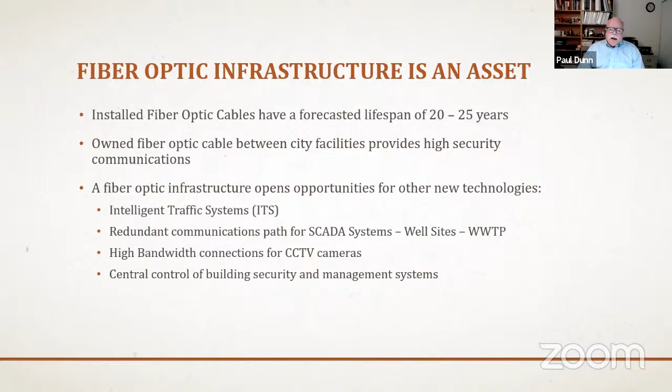CCTV cameras can be mounted at or on signal locations and can share the ITS connections to provide real-time visual information of the traffic situation within your city. You can also use a fiber network that centralizes all of your facilities to handle building management and security systems, and they'll benefit from central management and control.

We'll talk a little bit about fiber optic technology and how it compares to the technologies that we've grown familiar with, starting with dial-up. If you still have a dial-up connection today, you can get 56 kilobits of data per second, which amounts to not much.

If you imagine a 5 gigabyte movie at current data speeds that the city of Sumner operates at, which is approximately 150 megabits per second, it would take about 9 minutes to just download that data. At fiber optic, it would take about 5 seconds. So if you look at the capacity for a fiber optic network compared to Sumner's existing capacity, it's akin to trying to drink Lake Washington through a drinking straw.

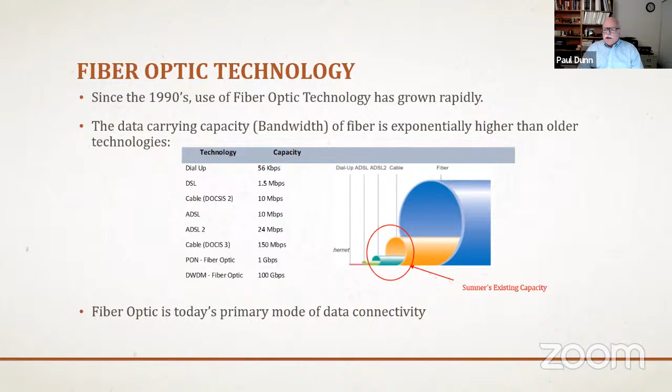I'll talk about fiber optic network construction methods, and there are 4 predominant ones. The first is standard plowing or trenching, and this involves a cut in the pavement or potentially alongside a road right of way, anywhere from 2 to 3 feet wide and down to about 4 to 5 feet deep. Inside that trench, you can install what are known as innerducts, or 4-inch conduits.

One conduit can hold usually about 3 innerducts. Think of those as miniature conduits that carry fiber optic cable. This is the highest cost and probably most intrusive construction method for implementing fiber optic. It can be as high as $300 a foot in high density or medium density urban areas.

When we did our construction estimates for the city of Sumner, we're estimating Sumner anywhere from $89 a foot to $113 a foot for construction. It's based on the location of the actual construction, whether it's in a right of way, in a street, or maybe on a trail. The national average is $173 a foot. So to sum up, it's the most disruptive and expensive construction method, especially if you're working in streets.

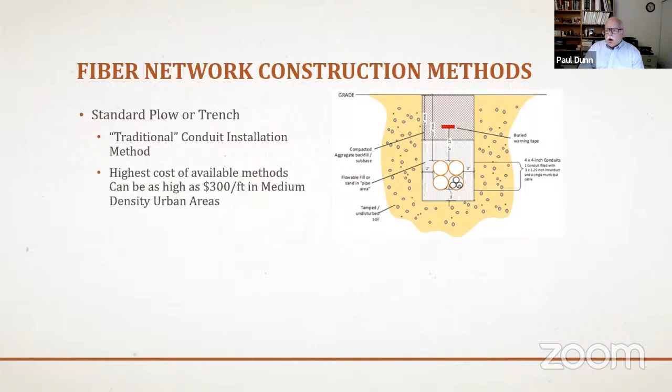A new technology that really started about 15 years ago is a concept called microtrench. Instead of digging that wide trench in a street, you're looking at a slit 1 to 3 inches wide and 18 to 24 inches deep. In the bottom of that small slit is installed micro conduit, and through that micro conduit, the fiber optic is usually blown through using pressurized air. It's really becoming a dominant construction technique in fiber optic network construction these days.

New York and Los Angeles have both adopted ordinances to support microtrenching. There are some areas in the city of New York that will not allow any other trenching method for fiber optic network installation. In Sumner, we estimated that microtrenching can range from $24 a foot in trail to $72 a foot in your right-of-way. There's a couple pictures here showing the actual grinding of a slit and then installation of micro conduit in that slit.

Some folks have been able to see up to half a mile per day of micro trench installation. So not only is it less impactful, but it is much faster than standard plow and trench.

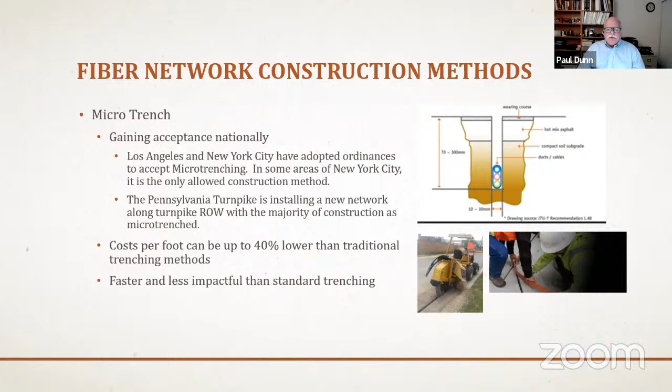Then there's aerial, and I think this is probably the one that we might find ourselves most familiar with because it's not underground. You see it on the poles around town. It's funny, as I was doing this study, I began spending a lot of time looking up at what was hanging off the telephone poles. I never did until I got down in the details of the study.

Aerial is the lowest cost construction method. It runs approximately $10 a foot. However, it's the most vulnerable construction method. It's vulnerable to vehicle accidents, tree trimming, weather, other natural disasters, and you also wind up with annual pole use fees. So if you're putting fiber optic cable onto a pole owned by Puget Sound Energy, right now the rates are about $17 a pole per year. So you have an annual cost that accrues as you're doing aerial construction. Again, balance it with lower cost, and it's a viable alternative.

The last predominant construction method is what's called horizontal directional boring. This is a photo of a boring machine. Most recently, the City of Auburn did a project down Lake Tapps Parkway from Lakeland Hills all the way down to East Valley Highway, and they used horizontal boring for the distance of that project.

In aerial construction, the construction cost estimate of $10 a foot includes labor, hardware, and what are called snowshoes in some cases. There's additional hardware used in an aerial installation. It's significantly lower because you're not digging underground. It would be mounting hardware, and in some cases what's called messenger wire, which actually holds the fiber optic in the air. So it is a lower cost.

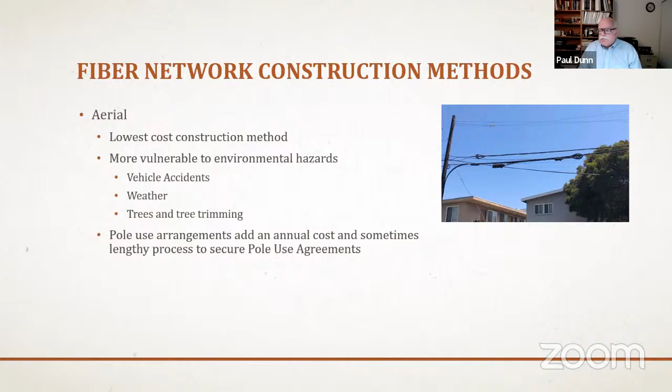All right, thank you. Any other questions for Mr. Dunn? I already have 17 wires on my telephone pole blocking my mountain view, so maybe one more wouldn't be seen, but I don't know. That is one consideration—there are some areas where those poles are getting pretty full. Yeah, I think that's all the questions we had.

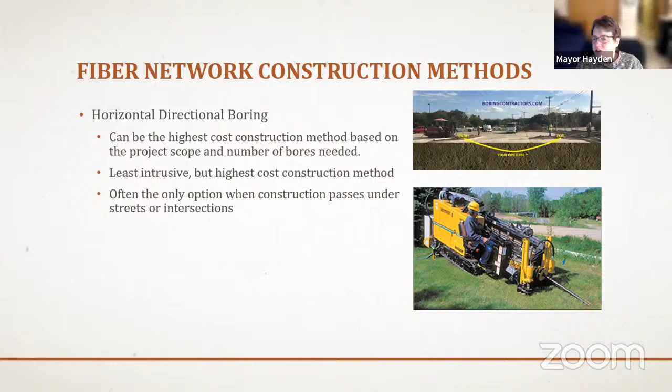Right, thank you. So Sumner's IT network today uses a buffet of different connection techniques. We have Comcast using Comcast Business that serves several of the locations. We have services from Lumen, also formerly known as CenturyLink, and we actually have some cellular hotspots coming via T-Mobile.

So each of these has distinct bandwidths. The highest bandwidth is at City Hall, and this represents your internet connection from the City of Sumner network out to the internet. Location to location coverage is at 100 megabits per second at the city shop, and then we go down to 40 megabits per second at the cemetery and the cemetery shops.

So right now it's a mix of commercial carriers to provide your data networking for IT between all city facilities. The limitations of bandwidth really come into play when you have a lower bandwidth connection. For example, voice communications to the cemetery is difficult, if not impossible. Bandwidth out to your senior center is fairly slow, which would limit public use. And you have a need for CCTV connections, like the Daffodil Valley Sports Complex, that just can't be met today.

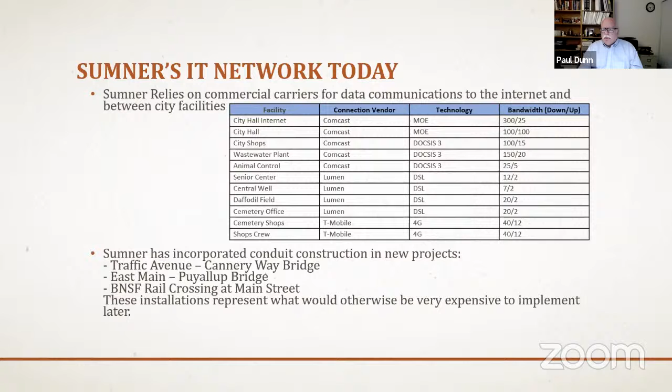Sumner IT department goals today are to establish resilient, sustainable connections out to the internet, to provision high-speed connectivity between the city facilities, building a full high-speed network between all city locations. You want to reduce your data connectivity costs, which gets into the own it versus lease it discussion, and also to partner with adjacent agencies and cities to establish connectivity. A good example would be connectivity between the City of Sumner and South Sound 911, allowing public safety communications a direct, secure fiber link between the city and South Sound 911 dispatch capabilities.

A Sumner-owned fiber network would reduce or eliminate your annual spend. Right now, you spend about $24,000 a year on data communications costs. Having your own network would drop those costs to zero.

As part of the study, we had discussions and conversations with Bonney Lake, Puyallup, the City of Auburn, the Sumner-Bonney Lake School District, and the Puyallup School District, as well as the Community Connectivity Consortium. In this presentation, I'll go into some details on each of your neighbors and neighbor agencies.

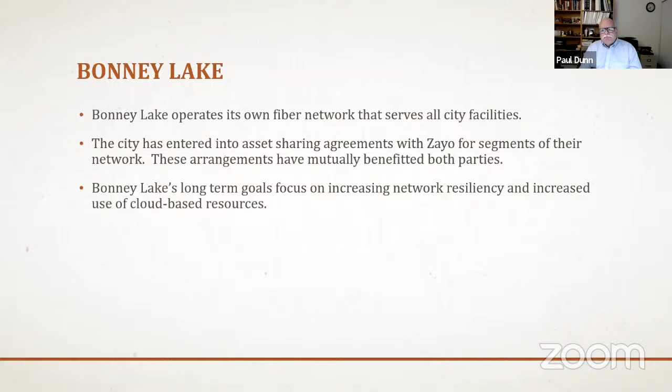The City of Puyallup's IT department manages not just IT and not just the IT network, but they also manage the city's fiber optic and traffic signal communications infrastructure. They have 62 signalized intersections. Right now, about half of those are connected via fiber, and the remaining signals connect wirelessly. So what they've been able to achieve is full control of all of their signalized intersections.

Right now, their overall communications budget is about $67,000. That comprises not just some leasing of fiber optics, but also their phone bill, cellular phones, and some data communication costs to the internet. Puyallup is contracted with Zayo and UPN, which stands for Unite Private Networks, for dark fiber connectivity, where city-owned infrastructure or fiber isn't present.

Dark fiber is basically fiber optics that are not controlled by the vendor. It's owned or leased directly by the City of Puyallup, and there's no third-party interaction to provide service over that fiber. They have partnered with Zayo and UPN, as well as the Puyallup School District, to share resources amongst themselves, and it has reduced their overall data communications budget.

Paul, what kind of maintenance does it take? You said fiber optic maintenance. Is it ongoing maintenance?

There's not a lot of ongoing maintenance. Generally, maintenance gets into areas where you might have a fiber cut or an interruption, say if there's a backhoe working on another project that interrupts fiber optic service. In some cases, you may need to do some splicing of fiber optic strands to serve other locations. So it's actually fairly low maintenance, but you do want to have some money in reserve for emergency maintenance, because fiber optic cuts never happen at 8 o'clock on a Tuesday morning.

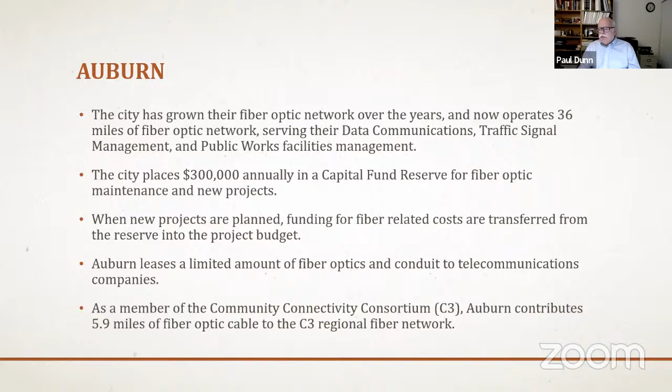The Sumner Bonney Lake School District, within Sumner, has 4 schools and 2 program locations. They also have administrative offices housed in Sumner. In 2016, they completed a build out of a leased fiber optic network with WAVE, also known as Astound Broadband. All of their schools are connected via a high-speed fiber optic network. The initial cost of that network was $1.32 million.

In 2021, their communication budget was $157,315 for data services, representing leasing services from WAVE to serve their network. The good news for school districts and libraries is the federal government's E-rate program — they recapture about 50% of their communication spend. They really saw the need as the 2010s advanced to get high-speed data services to all of their schools.

As we all know, technology in schools has blossomed since the early 2000s, and the requirement for high-speed connectivity just keeps increasing. With every student having a laptop, think of the bandwidth that's needed in those environments. So they've done a pretty good job building out their network.

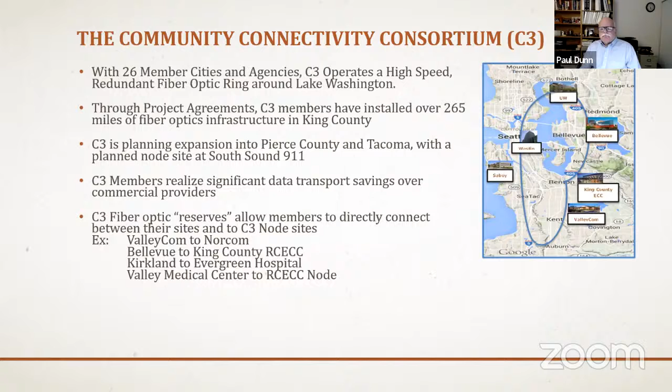Sumner currently has franchise agreements with 6 telecommunications companies. Most of those agreements are to allow the companies to operate and manage long-haul data lines through the city. Zayo and Wave currently have infrastructure in Sumner to serve data communications customers. We mentioned Sumner Bonney Lake School District as a Wave customer. Zayo is a Bonney Lake provider and also has some private services within the city. Comcast has exclusive or non-exclusive cable TV provider status for internet services and cable TV to all points in Sumner.

And I'll stop here for questions. We're at 6:35. I understand that we'll need to wrap up by 7, so I'll go as quickly as I can.

Mayor, I think you're muted. Do we have any questions for Mr. Dunn?

Councilmember Stewart: Thank you. I just had a question about that last bullet point. Does this allow, or would it ever in the future allow us, the ability of the city to allow citizens to get cheaper cable and internet service?

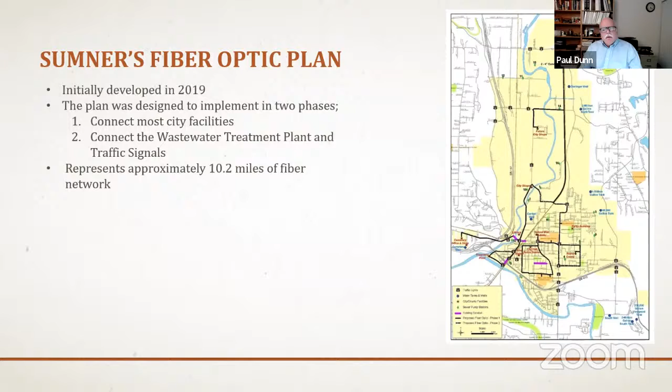So in 2019, Sumner IT Department and Public Works Department put together what they felt was a high-level plan implementing a possible fiber optic network. They put this into 2 phases. The first was to connect most city facilities, and the second part of the phase was to connect traffic signals and the wastewater treatment plant.

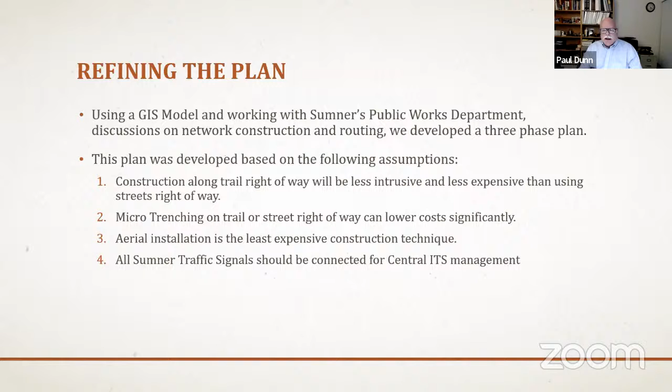Now, when we began working with Sumner and examining plans, we did some refinements. We based it on the following assumptions: that trail right-of-way is less intrusive and less expensive than using streets. We know that micro-trenching, either on trail or street right-of-way, will lower costs significantly. Aerial is the least expensive, and it really seems to be a priority within Sumner to get all of your traffic signals connected for central management.

So Councilmember Cole, to answer your question, the network as we designed it is about 9.1 miles total, and it's broken into 3 phases. The first phase is 3.3 miles, the second phase is 3.3 miles, and the third phase is 2.5 miles. 2 miles are on trail right-of-way, and 5 miles of aerial path are available.

In the first phase, we install what we called the north-south backbone. We installed the core of that backbone, and we connect priority city facilities. Phase 2 builds out the north-south backbone and connects more city facilities. Phase 3 is designed to be a la carte. You can actually take individual projects as required that basically connect to the already established network.

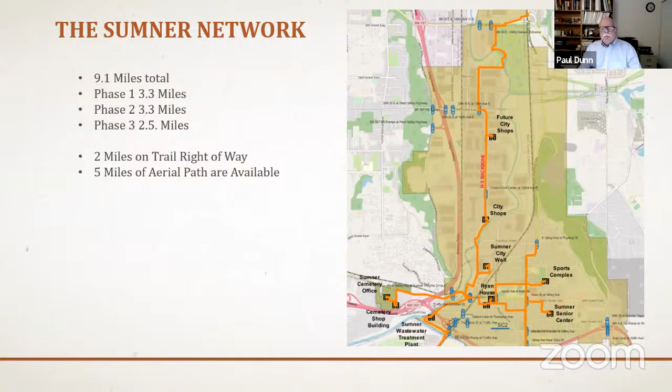So I do want to leave a lot of time at the end for questions. I will say in the report, these projects are detailed out, heavy detail with construction cost estimates and so forth.

So we'll say that phase 1 is primarily aerial. If you look at the long stretches of blue on existing poles, the orange is underground trenching or micro trenching. And we estimated phase 1 to connect the future city shops, the city hall, the wastewater treatment plant, and some of the signals along 142nd, as well as on Main Street. The initial cost for phase 1 is about $505,000.

In phase 2, we connect remaining city facilities. So this adds the cemetery, the shops and office at the cemetery, the Ryan House, the senior center, the sports complex. It also completes the east-west fiber link to move across from City Hall to the sports complex and a portion of the Valley Avenue north-south backbone. And it connects traffic signals along those routes as well. Most significantly, the Cannery Way Bridge and onto Valley Avenue heading west. Phase 2 uses primarily microtrench, aerial construction where it's feasible, and the construction cost estimate is about $860,000.

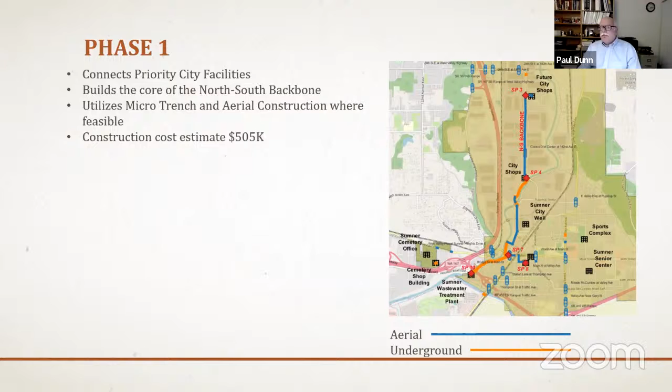Councilmember, did you have something? Yeah, now in phase 1, when I'm looking at the map, there are a bunch of blue symbols. Are those relay stations or what are those? Those are existing traffic signals. Oh, okay, that makes sense. All right, thank you.

Okay, that's a very high level review of the 3 phases of the project. I'll stop here for questions and happy to clarify anything. Any other questions for Mr. Dunn? I see none. Okay, thank you, Mayor.

Oh wait, actually Mr. Reed. I have a couple. First of all, I know it's definitely important for the tech side of healthy businesses. And I recognize that this is primarily focused on providing internal city services to our shops and other locations, which makes total sense. But I have a couple of questions about, one is, what is our ask? Other than, is this just an update of the study?

And then a couple of other things that are missing that I would prefer to see included, or maybe could be followed up later, would be like a 20-year cost to build and maintain versus a 20-year cost to lease or contract with an established ISP. And you already answered my other question about 5G. And then, I don't know the partnerships and the competition, but I also wondered how PSE could be a part of this.

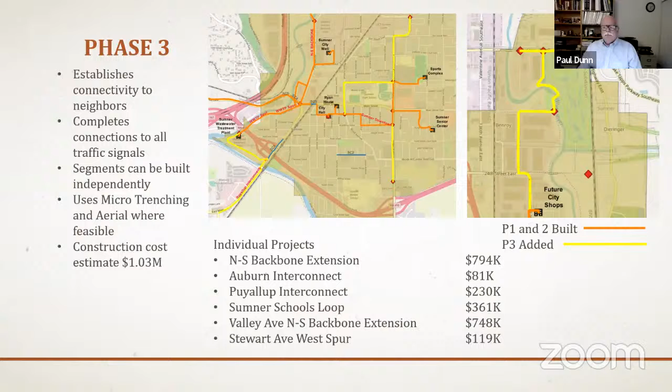Okay, thank you. We'll move into the fun part of the presentation, and this is recommendations. We have three categories of recommendations for you. One relates to standards and practices for development and construction, basically a how-to manual that allows the foundation for further planning. We'll talk about funding strategies, what we know is available, and we'll talk about collaboration and public-private partnerships. Hopefully we'll have a little time for a deeper dive into Q&A when we're all done.

Under standards and practices, we're advising that a fiber optic master plan for the city be developed. That differs from this presentation, in that what we did here was a pro forma construction cost and plan estimate. A fiber optic master plan will allow Sumner to align overall long-term strategic objectives with fiber optic network strategies. You can address how the network will benefit the city and identify a path toward completion. Ideally, that plan addresses the first five years in great detail, with less detailed but strategic goals for the next 10 to 20 years.

Micro-trenching construction is going to save significant costs. The city should consider adopting standards for micro-trenching and its placement — that is to say, where it is appropriate and where it is not.

In the area of funding strategies, there's a few areas, and first would be the city budget. As we mentioned earlier, Auburn has established a long-term reserve for fiber optic projects. They've been able to put a lot of their fiber optic network on layaway, if you will. They have some money set aside for it.

In discussions with IT and Public Works and also with City Administrator Wilson, the consideration of rate models, including the network costs for the wastewater treatment plant portion of the network, might allow some revenue if rates were adjusted to help finance the projects.

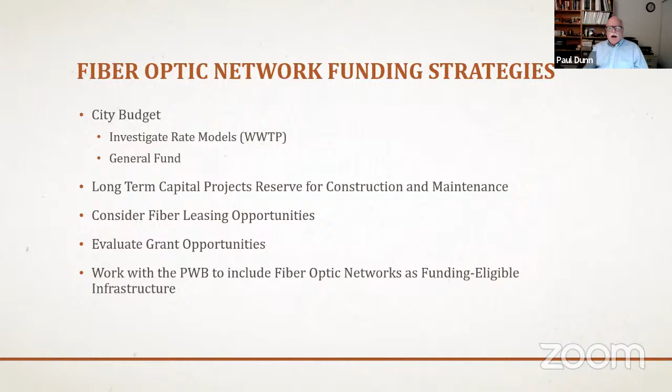I would recommend expanding partnerships between Sumner and your local cities and agencies. Each of the neighbor cities and school districts are willing to collaborate on projects. Public Works and IT should get together on a regular and frequent basis to share ideas and information. C3 offers a regional opportunity to engage and collaborate. Membership is free. C3's vision to expand into Pierce County means Sumner's membership would likely be welcomed. A public partnership could benefit current franchisees, Wave and Zayo, in expanding their networks and services within the cities.

And the case study that we mentioned between Westminster, Maryland, and Ting Networks reveals a real economic opportunity for them. In addition to building the city's municipal IT network, the city realizes revenues of $689,000 a year in leasing and subscription revenues. And Ting Networks is the internet service provider, so it's not a city utility.

And just a quick mention, also in the report is Morristown, Tennessee. They were an early adopter of fiber optics technology. In 2019, they generated $8.9 million of revenue.

So our conclusions, very quickly - I apologize, I'm running right up against one hour. Long-term fiber leases can supplement funding for projects. Existing franchises may want to expand within Sumner. We'd recommend that you look at UASI grant opportunities.

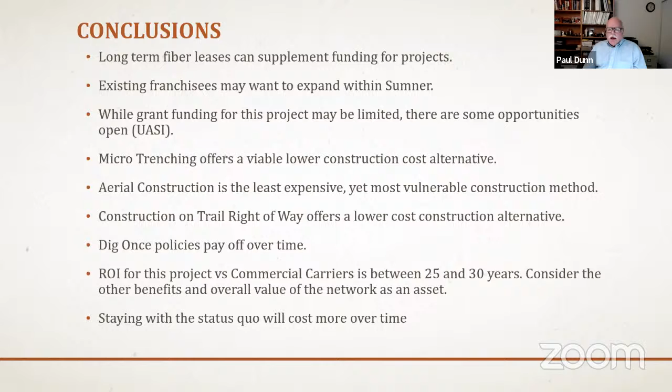And really at this point, I say this is the question of do you own versus lease? One thing we do know is that Comcast is not going to hold their rates at their current level for the next 25 to 30 years. Their costs will go up. So really, to conclude, I think staying with the status quo will continue to cost more over time.

Next steps, we'd recommend adopting standards and practices, build out a fiber optic master plan, consider dig-once policies, look at funding strategies for your 2023 and 2024 budget, and explore collaboration with public and private partnerships.

That opens it up for questions and discussion. Do we have any more questions for Mr. Dunn?

Councilmember Reed: Thank you, I've got a question, Mr. Dunn, on public-private partnerships. Are you aware of any type of voluntary improvement districts where the cost is shared through some major users that would benefit from it?

I will say that the South Bay Council of Cities in the Long Beach area in California has worked with commercial entities in building out their fiber optic network. So those opportunities are there.

And I think in summary, you do have good opportunities with Costco, REI, and Amazon in particular. That's what I was thinking, with their heavy technology needs and reliance, that there might be quite a few public-private partnerships available.

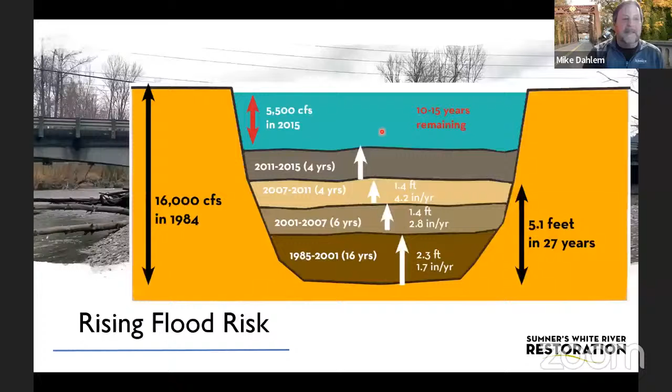So what we've done is come up with basically 4 projects. These projects are to widen out the area that the river can flow, but also keep it within that confined area so it doesn't flood the different areas, especially the industrial area.

The fourth project is what we call a habitat project, and that's the project we're going to talk about most today.

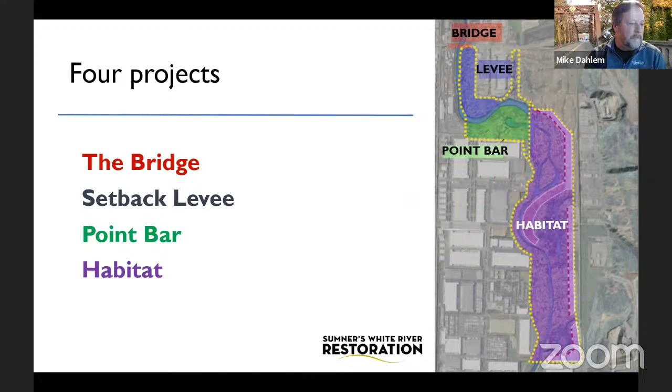The habitat project restores about 170 acres back to the floodplains. We'll be creating side channels, wetlands, and large storage areas for the floodwater, so it goes into this habitat project rather than going into the industrial area, and provides additional habitat for our endangered species, salmon.

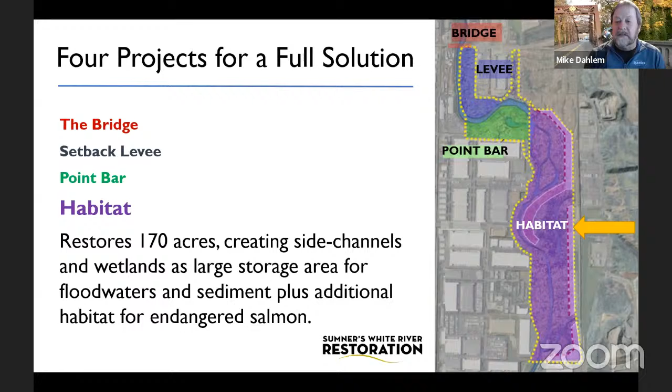And with that, I'll turn it over to Robbie.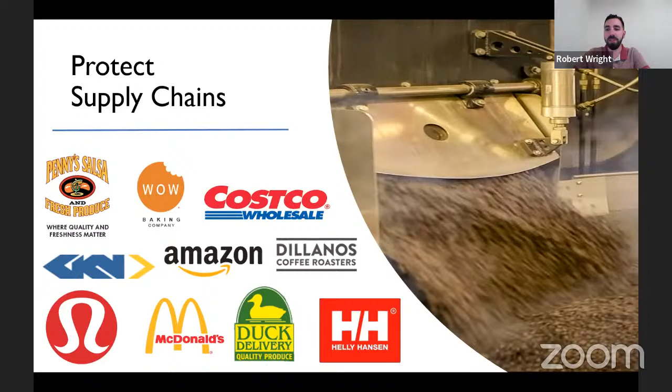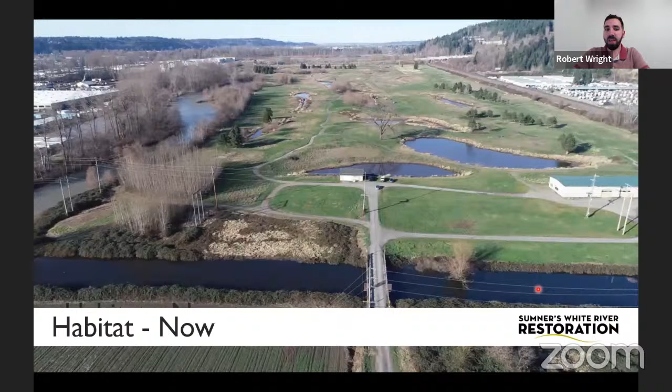This will give you an image of what it's going to look like. Here's before—this is at the tail race looking north towards the golf course, with 16th Street at the north end. This is kind of how it looks today, the before picture. And this is how we expect it to look in the future, post-project.

The gray area is where the BNSF tracks will be. As you can see, we're creating a whole new river channel, which is where that big habitat benefit's going to be coming from for the salmon—a place for them to get out of the main river when flows are getting as high as they are tonight, so they can seek refuge, hide, and eat some food to grow bigger before they migrate downstream out into the Puget Sound.

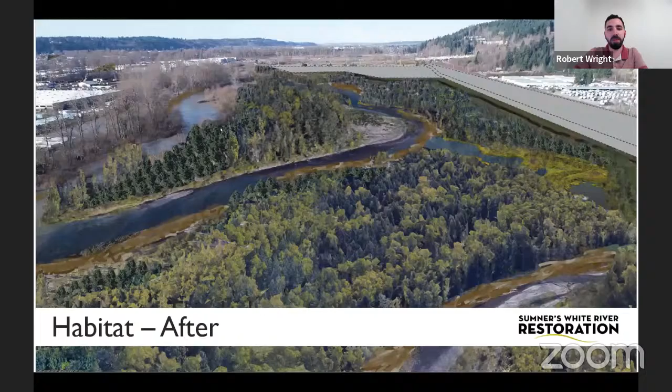We have another slide showing the before. For scale reference, Mike said 170 acres—how big is 170 acres? It's hard to fathom until you see it from an aerial. That entire side, from all the farmland up to the golf course we were looking at earlier, is part of this project. This is the largest project of this type in Pierce County, possibly even the state.

Here's another image of what we expect it to look like in the future. We're moving a lot of dirt, over 1 million cubic yards of it or so, but we'll get more into that later.

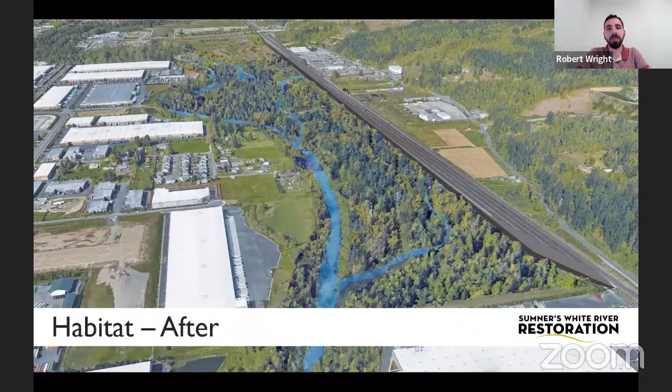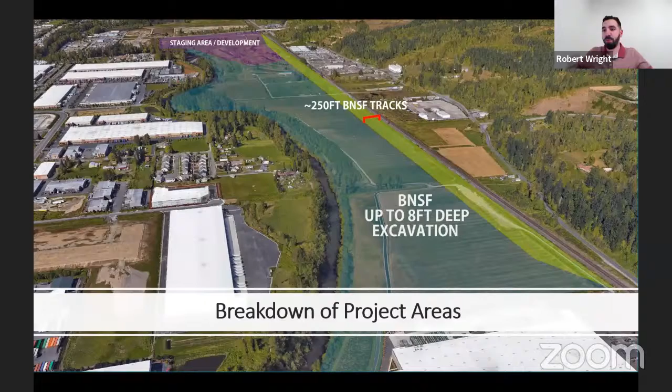Here's some stuff on how it will tie in later. We mentioned partnerships—one of our partners is BNSF, and here's where their work ties in with the development, but we'll get into that more in Andrea's portion. With that, we turn it over to Mike to talk about our partnerships some more.

Thanks, Robbie. Good evening, Mayor, Council. When the city first started this, we received legislative funds back in the last quarter of 2015. At that time, first quarter of 2016, we created what we called a dialogue group. Part of that group was Pierce County, the Puyallup Indian tribes, and the Muckleshoot tribes. After 45 meetings, this dialogue group has enlarged to include BNSF, Cascade Water Alliance, and the organizations you see in black, like Floodplains by Design and the Nature Conservancy. They've either been presented this presentation, been part of the dialogue group, or chose to come to a couple of the dialogue group meetings.

So with those funds, we were to create a solution for and design one project north of 16th Street. And we had to really look at the whole river from north of our jurisdiction all the way to the confluence.

The other thing that has happened within this dialogue group is that these entities, mainly Pierce County, Puyallup, and Muckleshoot tribes, have been involved in the design. So the permit application that we submitted last year to the Army Corps of Engineers has had input from this group, and has been a collaborative effort, so we've been very successful in making sure that the Army Corps of Engineers and Fish and Wildlife know that we've had this collaboration with the tribes.

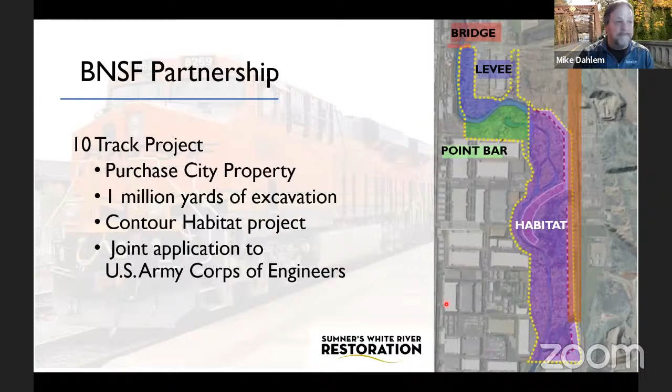We're also partnering with Cascade Water Alliance. It's part of the three-party agreement we'll talk about later, but we'll be swapping some land with the railroad and Cascade in order to build this whole project.

They authorized their property so that we could put in the permit prior to transferring the ownership of the property. And the other part is allowing us to relocate the tail race.

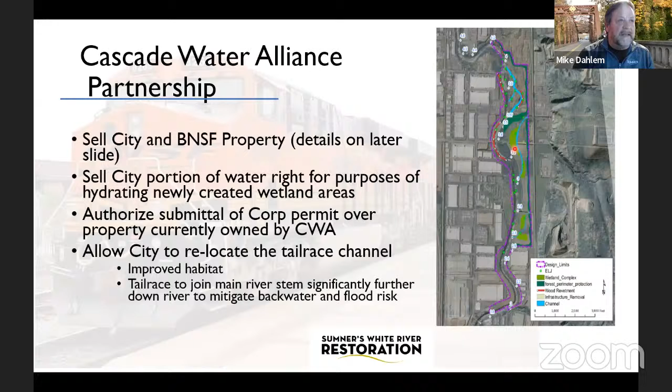Right now, the tail race just goes straight out to the river here. On the other side of the Burlington Northern tracks, we'll be turning it to the south and moving it down so it meets the river further downstream. That'll help keep backwatering, water from the river going backwards into their turnstocks at where they release the water from Lake Tapps. Also create nice habitat for salmon in there with the backwater.

So our current status, we did put in our Corps permit in June of 2021. We expect it to take about 12 to 18 months, so we're not looking for our permit till after June of this year. We've done a SEPA on the habitat project. We've completed 90% of plans for this. We've reviewed it, so everybody's put their comments in, and we're finalizing those plans as we speak.

And then we're completing the utility relocation design and also the permitting to relocate those utilities. We're hoping to do that this spring, summertime, relocate our utilities and try to get PSE in right behind us to relocate their utilities.

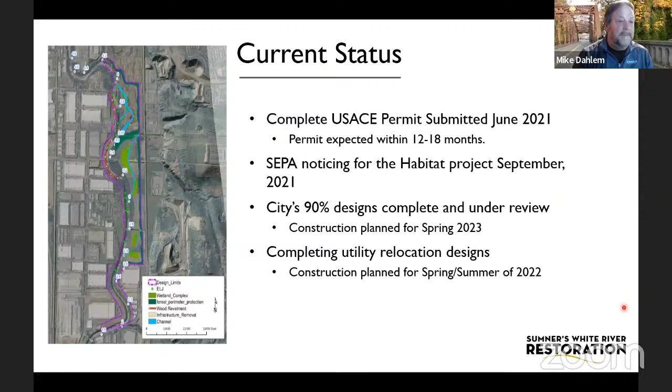So now I'll turn it over to Andrea.

Okay, thanks, Mike. So the project components that everybody just spoke about ultimately have to be wrapped up in written agreements so that all of the parties involved in this huge project understand their roles and responsibilities, the timing, etc. So my goal tonight is to introduce you to the master agreements at a high level, the basic purposes and terms of those agreements, so that you have an idea of what to expect in the coming months as we continue to negotiate with all of our partners on the agreements that will ultimately make this project a success. Our goal is to have these agreements negotiated and ready to execute for council approval by the time that a Corps permit is issued.

So the first agreement that I want to introduce you to tonight is a purchase and sale agreement between the City of Sumner and BNSF. This is about that strip of property that Robbie and Mike just spoke about for BNSF's sidetrack project. It's approximately 250 feet, and there's an image on the next slide that we'll get to. There's approximately 250 feet there in the lime green that BNSF needs in order to build out their 10 sidetracks.

As part of that purchase and sale agreement, there are terms and provisions that relate to BNSF's excavation of the 1 million cubic yards of soil, and also the logs that BNSF currently owns, that they will be providing to the city in kind for our engineered log jams that will go in these side river channels. So the value of the work BNSF will be providing to the city is providing the city with fair value for the property that it will convey to BNSF. This is not intended to have cash exchange hands, but rather be a swap of services for property.

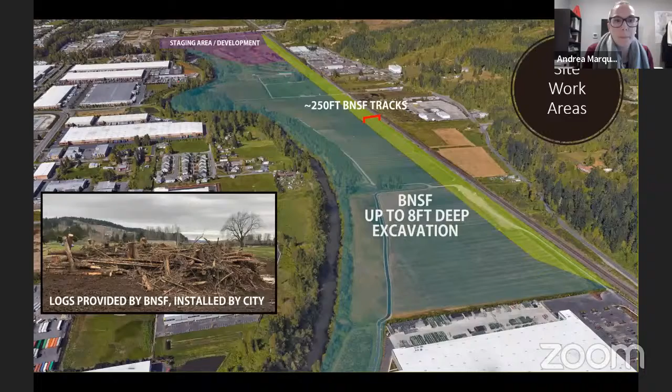Next slide. So the second agreement is called the site work agreement. This agreement is also between the City of Sumner and BNSF. And the site work agreement is really the meat of the deal between us and the railroad. It discusses who is responsible for what and when.

So for example, there are provisions about the collaborative effort we have already undertaken regarding the permit applications to the Army Corps of Engineers. That was a design and application preparation exercise that members of the city and BNSF team shared equally. And it's been years of work in the making before we were even prepared to submit for that Corps permit.

It discusses design and construction plan, preparation and approval processes. It discusses the side channel work that BNSF will be undertaking, when they can start, how much work they have to do, the fine grading and rough grading requirements they will have to comply with for those side channels. There are provisions about the railroad's ability to take that dirt they excavate out to build up their sidetrack berm, and the price and value on that dirt. There are provisions for inspection and approval rights throughout the construction project.

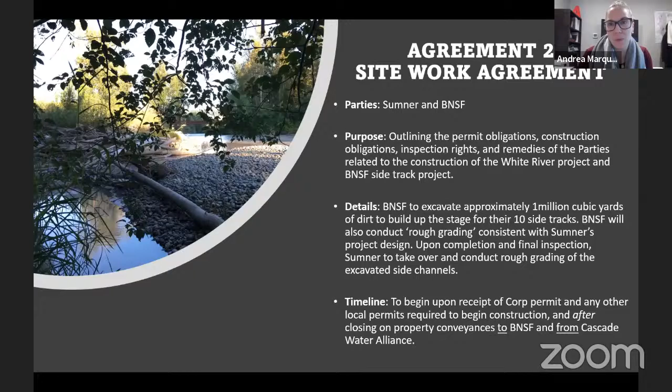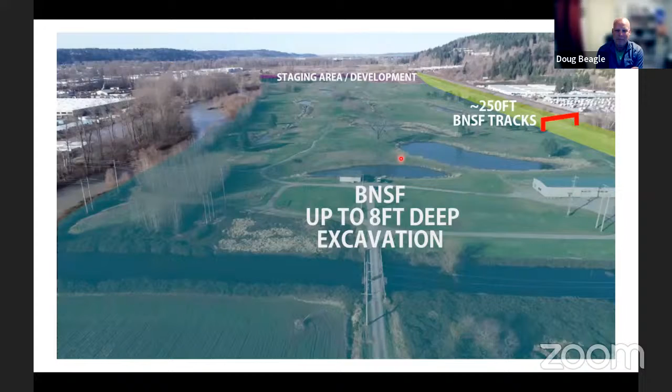And Mike or Doug, I don't mean to put you on the spot here, but what's the elevation differential between now and after the excavation is complete? A couple feet — up by the golf course, it's up to 3 feet of cut. And down at the south end by the GSA building, it will be roughly 8 feet of cut. And then the one thing we were able to do is design this so that we could save that very large maple tree in the middle of the project. It's very important. We've had questions about that from citizens. Thank you. Next slide.

So the third agreement, and perhaps the most important agreement to really make this project a success, is something we have called the three-party agreement. This is an agreement between Cascade Water Alliance, BNSF, and the city. It involves property conveyances required to make this thing work. It involves boundary line adjustments required before properties can be conveyed. It involves easements and upwards of 40 sub-agreements required to ultimately make this work. So it has been, like I said, years in the making already, and we're working really hard to prepare all of the documents necessary for closing on this project.

Most importantly from the city's perspective, the three-party agreement addresses the relocation of the tail race. Cascade Water Alliance owns that big body of water that goes east-west from the old powerhouse to the river. As part of this project, the city will be relocating that to the south. As you might imagine, that matters a lot to Cascade. They care deeply about the design and future of their tail race facility. So there's a lot of detail in this agreement about the city's responsibilities related to the relocated tail race. We also have to acquire the property that the current tail race is located on.

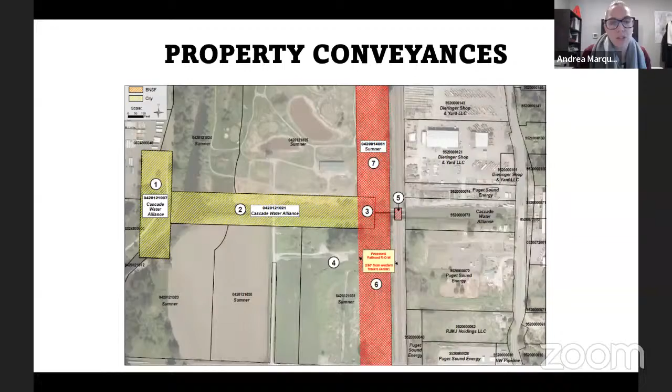So as part of the three-party agreement, there have been countless monthly meetings related to the design of the project and plan approval. Cascade's engineer, the city's engineer, and BNSF's engineers have all been involved in the design and development of the plans that will encompass this project.

There's indemnification provisions, there's warranties that all the parties are making related to the success of this project. There's representations on the property conveyances. There's responsibility for ongoing maintenance, both for the railroad's maintenance of the bridge and the city's maintenance of the relocated tail race. So like I said earlier, it really takes all three parties to make this work. Each party is gaining something for what they are providing to the collective effort. And so this is a very important agreement.

We have been working really hard to negotiate terms that are fair for everybody involved, and will continue to do so. We suspect that the timing on this agreement will be upon receipt of an Army Corps permit, because there may be conditions in that Corps permit that require some last minute tweaks on these agreements, and then they would be before council for approval so that all the property conveyances can close and construction can begin.

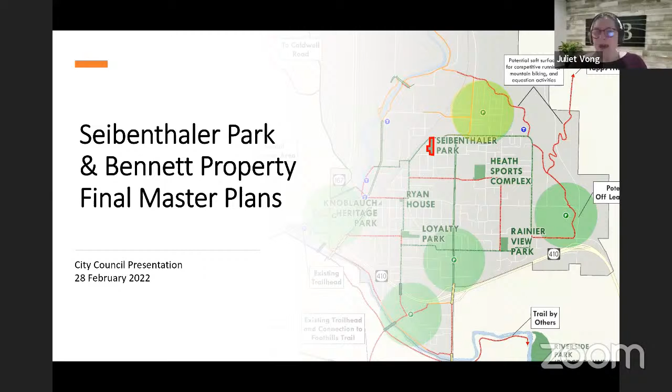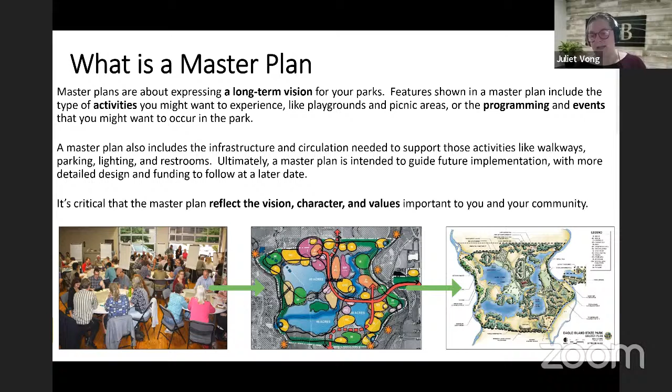We'll go with this. Most of this you're going to see from the last time. I've just added some of the newer information to help convey the current status of our process, from the preferred master plan concepts that Derek presented previously to where we're at today. I'm going to flip through a couple of these items relatively fast.

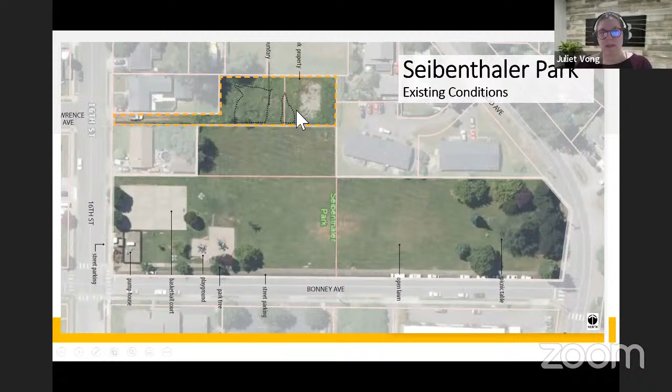Existing conditions, just to remind everybody: Seibenthaler Park, the new property that was added is outlined in the dashed orange, with wetlands shown in the dotted line. The previous preferred concepts we showed had a play area and spray park upgrading and expanding to become the core of the improvements, with more plaza, covered picnic, and open space areas. With the spray park, we need a restroom, which necessitated some shifting of the sport court. We moved the dog park to the east end of the park so we could make it a little larger, and looped everything with more trails through the park.

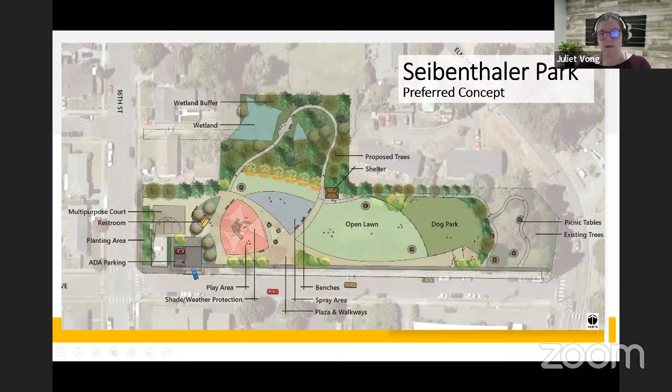The final master plan that we're proposing remains much the same. We received some comments both during the process and meetings that Derek had, as well as with the Parks, Forestry and Parks Commission. Some of the things were to look at this overlook and make sure it was accessible, so we made this more of a paved trail and overlook area.

There was some interest in really bringing in more trees. I think one of the nicest elements of this is the shade that happens on this north end, so bringing some more trees and shade canopy into the rest of the park. And then looking at ways to further separate the playground from what could be the right of way in this area. We also looked at how to tie the remaining lawn together a little bit better.

As a reminder, we do have ADA parking proposed long-term in the master plan. Short-term, we would look at restriping a parallel ADA stall. This design is also developed so that you could in the future convert all of the on-street parking through this area to back-in parking if additional parking were needed, once the spray park is built—the likely scenario between the spray park and the play area. If it gets as heavy use as we might expect, and the neighbors really do find a need for additional parking, we've accounted for that in the long-term master plan.

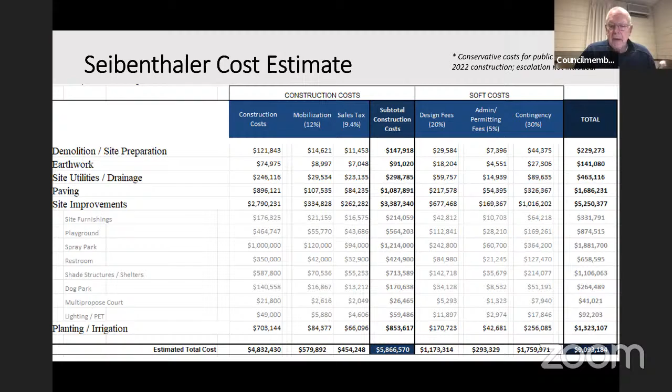This is a really good cost estimate spreadsheet. Is there a way you can send that to the council? Derek, I'm assuming that will come from you and all this detail is available. I don't know if I sent you the PDF directly, but I will do that right after this meeting. Yeah, we'll get it to you. All right, thank you. This question may apply to both parks, and maybe I should wait till later, but I'm curious about security.

It is a good question, we did look at it for both parks. For Seibenthaler, we are looking at lighting along both the street frontage and around the play area and spray park, recognizing that this location might want to get used a little beyond when it gets dark during some of our seasons, so that does have some additional lighting. Both sites also include a pedestrian emergency telephone connection so there is an emergency resource for anybody who might need it out at the park.

We looked at crime prevention through environmental design techniques, CPTED for short. That's a whole discipline that we have some experts in-house on, and Derek's got some experience with this as well. It's a method of really looking at and evaluating a site to think about more intuitive ways to make things feel safer and more comfortable — things like sight lines, activating parks, eyes on the park. So keeping views open, having lighting in appropriate places where needed, thinking about how it's going to be used and how visibility through the park can continue over time.

Okay, thank you. Councilmember Reed. Thank you, Mayor, and Earl beat me to it — I was going to wait until after the Bennett one, but I have the same concern on security. I think this is something we're going to want to address in the long-term budgeting, either some type of increased presence and enforcement, or anticipating heavy replacement costs based on what we've already been seeing from the other parks. We're going to have to mitigate that in some way, and what that looks like I don't know, but it's not evident in the initial cost estimates, so that's something we'd probably want to work in there at some point. But otherwise, I love it.

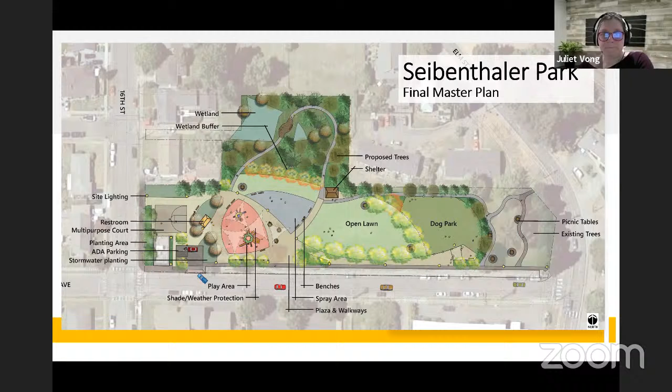As you talk about security, that is certainly a concern we've discussed at length on this particular property. We are surrounded by single family residences with currently a single entrance off of the highway. We have a single wetland that sits in the middle of the property. The preferred concept major component was providing access to this park, for both security and emergency vehicle reasons, protecting the neighborhood being one of them, bringing circulation through the park off to 46 to provide more than one way in and out of the site.

You can see the uses that were proposed remain very much in place. A big component, including for cost, is the fact that the wetland sits in the heart of the park. So one of the major elements is actually doing the wetland mitigation to relocate, improve, and create a much stronger wetland system that helps act as a buffer and a bit of security to those adjacent residences. Our final master plan looks much the same.

I'm going to flip back and forth a couple times because it's a little hard to see where the changes were. This one was really heavily supported by the process. The biggest elements we looked at were comments to get some stronger buffering along the backside of these neighbors. They were feeling a little left out of the buffer components, so we added buffering there as well as in the front.

This is a tricky relationship between making sure views of Mount Rainier remain while still providing some canopy, trees, and accent planting within the heart of the park. As final design occurs, we'll need to continue pursuing and looking at that more closely. Also bringing in more canopy was a comment from the Forestry and Parks Commission, particularly around the open space.

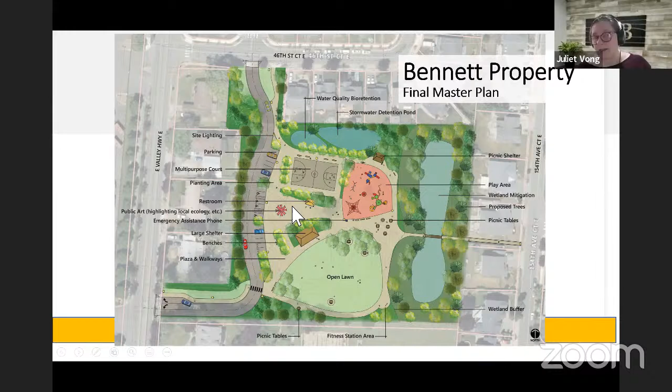This one is a little harder to slice and dice into too many smaller pieces. Really, we needed to think about what is a minimum improvement to open this up to the public. We need to be able to bring access. We need ADA accessible parking at the site. We need some kind of trail system and likely some kind of restroom facility as well in order to just open up the park. Once we get more into phasing and funding opportunities, we can start to develop what that could look like a little bit more.

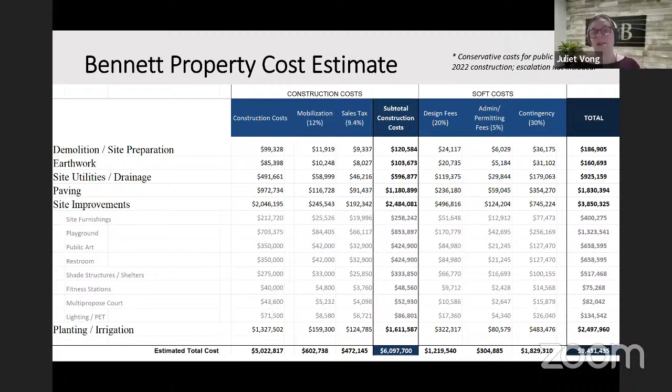RCO is not likely to fund a project that doesn't include ADA parking or restrooms for a park of this size, though they don't necessarily have to be permanent restrooms, we just need to account for them. It's also difficult for RCO to fund something without some recreational improvement, so at least a trail that gives people a walking and recreational experience. Those conversations are currently underway with RCO to see if we can put a grant application together in this round or one coming up shortly after.

Derek, does that cover it well for the initial discussions? Yeah, that was a good summary. I've met with our grant manager and had some good conversations about Bennett in particular, since it's a brand new park. That puts us into a different category because we're going to look at acquiring the property to the north to finish out the access onto 46th. That's good for us, but it will cost more with the match portion, though it does help out. There are some strategies behind it.

There are some other options she went over with me in other categories within RCO. We'll have ongoing conversations with her, like Juliet summarized, about what's the minimum to get this going, what's the best strategy, and what will give us a successful application. They have some incredibly challenging and competitive grants, and some others that are often more open and available, with underutilized grants we'd love to find the right project to fit into.

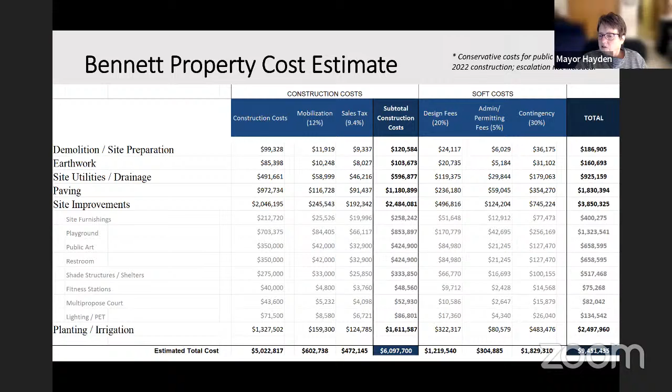As we develop the master plan report, the phasing and grant opportunities are typically similar to your planning documents for the city, we leave them a little open-ended so there's flexibility in what you actually build, with a first phase that matches your best opportunity to get those grants. But we will start to highlight what some of those opportunities might be. We'll also get started on the SEPA checklist and ultimately look for long-term council adoption once the documentation is complete.

All right, sounds like a lot of work to me. And up next, we're gonna be doing...

You'll be seeing this again in early April for adoption of the plan. At that time, you'll probably be seeing something called a grant authorization as well. It's an RCO requirement for any application you do. It's pretty standard, we've done it for every application with RCO. So you'll see a slew of those saying yes, you have authorization to apply through RCO. You'll see a bit more next month.